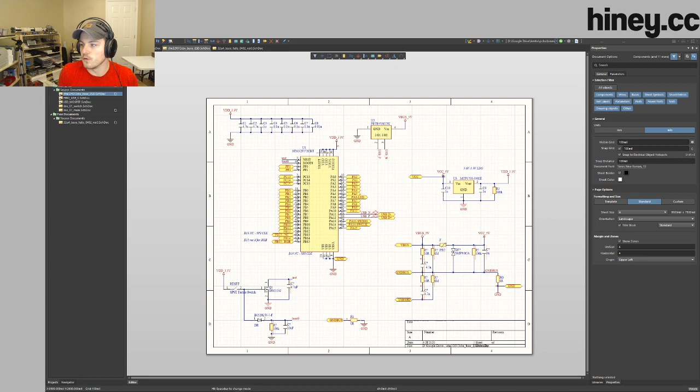Did it work? I think it switched. Cool. Alright, so I'm gonna try a series of streams, probably videos

that I will put on YouTube and other who knows what. The goal of this is to do a full stack development, basically designing a keyboard from the ground up, from everything. So kind of just my methodology on doing it and how I do it. It might not be perfectly applicable to everyone since a lot of people don't use the same software I use, but it might just be cool to see. It's an idea I've been wanting to do, so I figured I want to design a new keyboard, so I should maybe do this, just to do it. I think it should be fun.

Yeah, we're gonna give it a shot. Alright, cool.

This is gonna be my Ibis keyboard. I was just kind of messing around here with some of the PCB stuff.

Browser source, add source, Chrome. What's up guys. Add source, URL. That's not what I want to do. Delete. Thank you for following haamtime, much obliged. How the hell do I do this? Media source, window capture. Cancel. Alright, fuck it, we're just gonna do it this way.

Alright, so we're gonna make the layout for this. I usually start with your 104, but we're obviously not gonna use that. We're gonna do some other fun stuff here. Here, let me do this.

Let's do it this way. Keyboardlayouteditor.com, so it's just going to kind of be what I guess the layouts we're going to use.

So the goal here is to use the Duck Blackbird layout, except basically, fuck HHKB, I'm not gonna do HHKB. I think it's ugly, so we're gonna do just standard. So this is kind of what we're gonna do right here, in essence.

Like I said, I like to start with the base 104 key layout. Yeah, exactly, yeah, it's just not good.

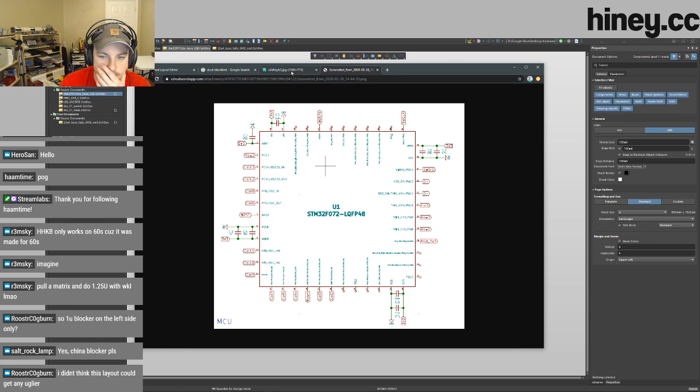All right, be nice. So that's gonna be another option. Honestly, I might just stick with those 3. Anyone that wants a 1.25 bottom row could suck me off. I might get rid of these. I don't like those.

Hi, Haley. Yeah, so that'll be the idea. Oh, we gotta do fucking split backspace. We gotta do fucking this stuff.

Stepped caps lock. Because if you're not using stepped caps lock in 2020, you're kidding yourself. Yeah, people like split backspace. I don't know, dude. I don't care enough to argue.

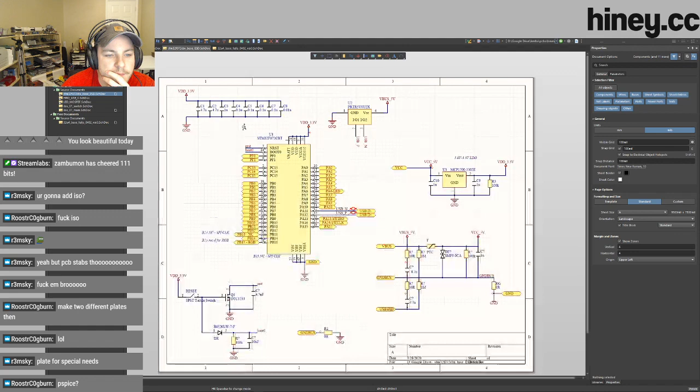always forget, so I was gonna edit this real quick. So VBAT gets 100 nano. So VBAT gets his 100 nano. VDD and VSS, or so this one's gonna be pin 48. I'll do that.

Text 1. So I know what pins these go on. 48s. Which one did I get? I got 100 nano as well.

Fuck off. Fuck knobs, dude. I don't like knobs. People are like, dude, knobs are so cool on keyboards. Like, I'm never gonna use it. I'm not gonna put one on a keyboard of my own. So I'm sorry, as I've said before, if you want to be a knob, you can be a knob. However, I do not want to be a knob. So I'm not gonna be a knob.

100 nano, 36 and a 4.7. Nope, it needs to be 36. Yeah, I think knobs are ugly, they have their purpose probably, but I don't want to do it. That's 24, right? 100 nano, 24. And then the other two go on pin 9. 1 unit 10 nano.

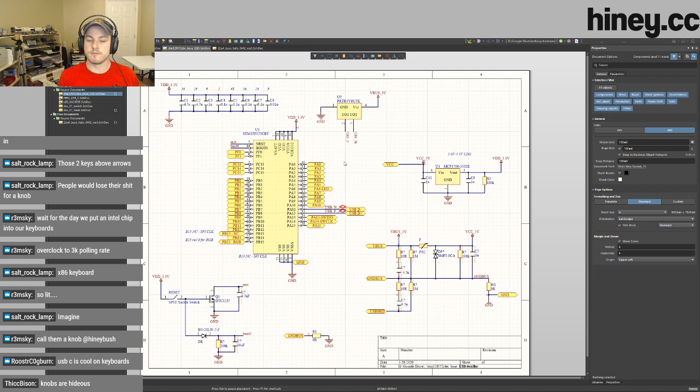All right, so the base is done, and the way I do these, as you guys will see here, I'll do it right now. So this is like the actual main schematic that I'm gonna be using, which will have everything that I need on it. The cool part is I don't need to put all of this stuff like copied and pasted. I'm gonna annotate this real quick. Update change list. Accept.

Anyway, so we don't have to take all this stuff and copy it over. What I do is, since I have it referenced in my project itself, I can just add it as a sheet symbol. So like here you can see this one's USB-C. However, we'll put that one in later. So this here is the microcontroller, so that's a symbol for all this.

Sheet symbol actions, let's make this taller. And so what I can do here is synchronize all this shit. And there's all my IO. Makes it super fucking clean and nice.

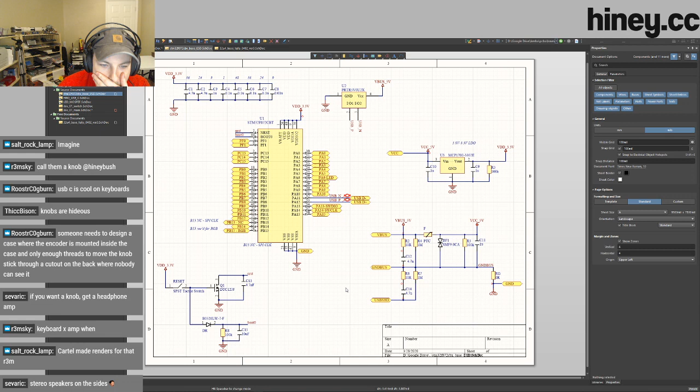Why do I have 2 grounds and 2 ground buses? That's kind of weird. Oh, because I have 2 ports. Alright, I gotta fix that. Oh yeah, I don't need this. Or this. I copied this shit, this is all ESD stuff. I copied all this from another schematic, so I had to fix that. Alright, we should be good now.

Yeah, the headphone amp thing, that was kind of dumb. I'll just delete those, I guess.

Alright, cool. So I guess the next thing with this is we can start doing all the fun stuff. Ground bus - I have 2 grounds here for USB stuff.

We'll go over that in a bit. What's up, Soran? How you doing, bro?

Alright, so this is my microcontroller and all this stuff. That's easy to do. We'll do the same thing here for the USB-C.

So it's like this. I hate, sometimes it doesn't switch over. I don't know why. Alright, fuck it, there we go - HRO USB-C.

And this one's gonna be the LED MOSFET that I use, so I'll put this up here because this is how to control the LEDs on and off. And then the last one will be the switch matrix, which right now might not be done. No, that's not done, I haven't done that one yet.

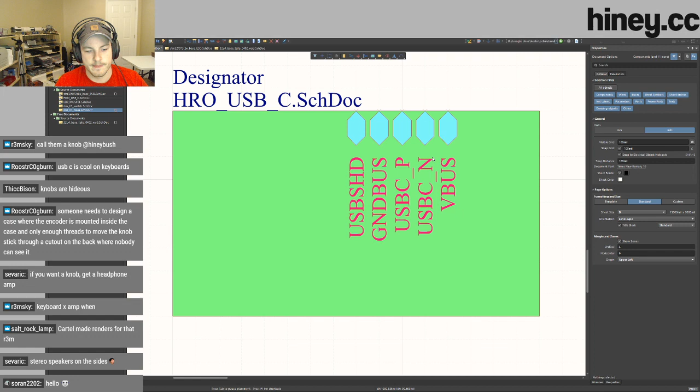Alright, so this is basically everything. So these are my USB symbols or signals. Here's my USB port, here are my CC lines. All this is already fully ready to go, which is sweet. It's super easy, so all I have to do here is organize these nicely so they're not in the wrong order.

Net them out - USB negative, USB positive. And then I copy this, so here - so now this is connected to this. Very easy, very easy.

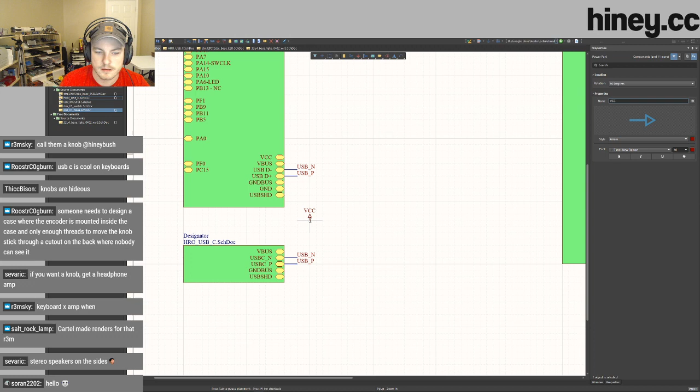Now I'll do the same thing for all these power ports, VCC. So VCC and VBus. VBus is coming directly in from the USB port. VCC is like a cleaned out, smooth version of that after all the ESD stuff's done.

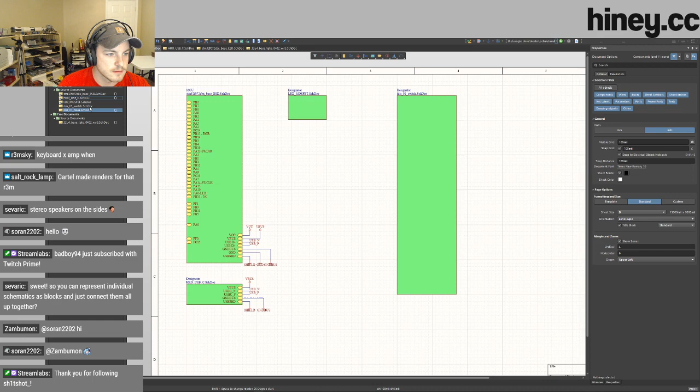So this is all I want to do with this for now. We'll concentrate on the switch matrix the rest of the time. So this is, I think, the switch matrix from my H88. So this isn't what we're gonna use.

Holy fuck, okay anyway. So we're not gonna do this exact matrix, but it's a good starting point, I guess, so I don't have to do everything over. However, I am gonna delete half of this stuff, so it's fun. Actually, yeah, fuck it, I'm gonna start over. Alright.

Alright, so I gotta add some switches. So I have a whole bunch of different ones - I have hot swaps, I have some keep out, I have non-keep out, I have hybrids. I might continue with the hybrid stuff.

Cause I kinda, dude, I miss Unreal Tournament. Unreal Tournament was fun, we played that all the time in high school. I think we played UT 2004 in like 2011. Those were the days, it was so heavily modded because each generation of students would add more and more shit into the folder that we would copy onto our C drives. I haven't played... actually no, I did play the newer one. I don't know if it's the newest one, but I played it a bit, probably 2 or 3 years ago, I want to say. It just has so much nostalgia associated with it in my head.

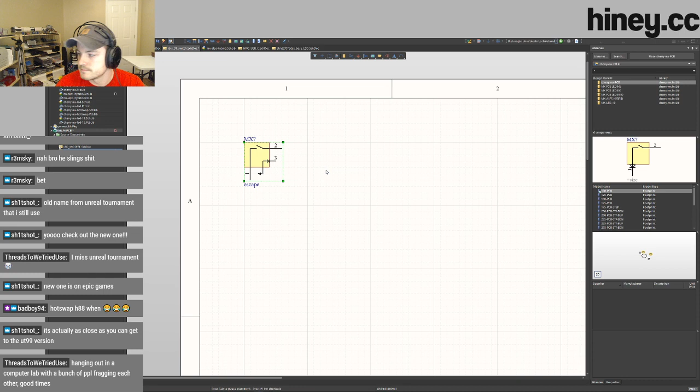Hot swap H88, when? Probably whenever I get around to just doing it, because I do want to do that. Yes, Duck Boy, I am a nerd.

Alright, so this will be escape, this will be F1. This is easy for me to keep track of what's what, I guess. F2, blah blah blah. Thank you, Saygan, for that follow. F4. This will probably take a little longer than normal because today I just click and go, but we're doing this a nice way.

I'd be sick if I get these to increment nicely, but that won't happen.

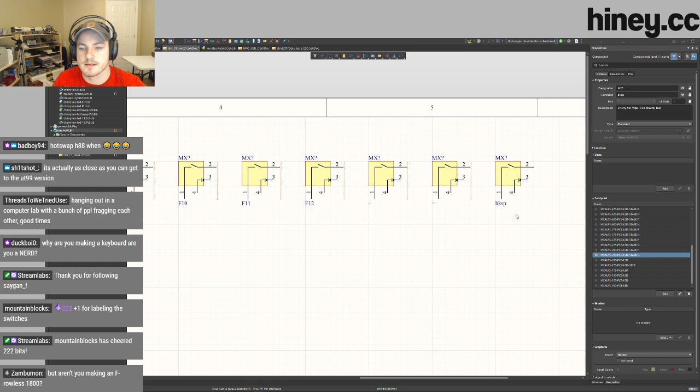Sometimes I do try to reuse these, but since I'm doing a new method, I may as well start it over. Thanks for cheering that, I appreciate it. Honestly the main reason I'm doing this is so I kind of know what's what. So for this one I'm going to do stab down, south facing stabs I think for most of this. Oh, I think I'm going to make a bigger sheet.

Goddamn. Thanks for cheering those bits. Aren't you making an F-rowless 1800? Yes, I am, that is what this is. So what does that have to do with anything? I'm not following. We're also gonna need a key here for the short back or the split backspace.

So do that, and then it was just gonna be page up. We'll just call it page up, doesn't matter. Ibis before or after H60. H60 protos are like coming in now, so this is probably gonna be down the line sort of thing.

It's just gonna be fun to do. I don't know, make this one num. I don't even know what the hell keys are on the keyboard anymore. Num divide. This would be num. That thing.

I'll do pause because I like pause here. Or no, what typically goes there? Minus. Num minus.

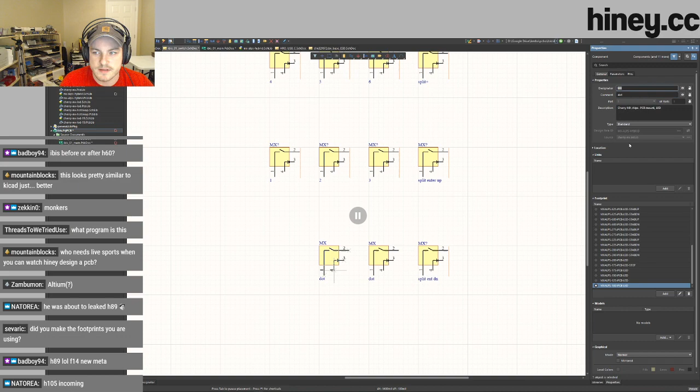Cool. Alright, so anyway, let's go back to the main alphas over here. MX Alps hybrid. This will be a stepped caps lock and regular caps lock combo. So it'll be a combo caps LED.

Do 1Us. Full size customs, dude. It's gonna happen. I'm waiting for it to happen. The demand is, I think, finally there. So I think that'd be neat.

S, D, F, G, H, K, L.

Colon, call that the colon key, and then the quote key, and then this is going to be a 1U ISO key, 1U ISO dumb, and then this will be enter, which will just be one combo enter key. So yeah, that will be that.

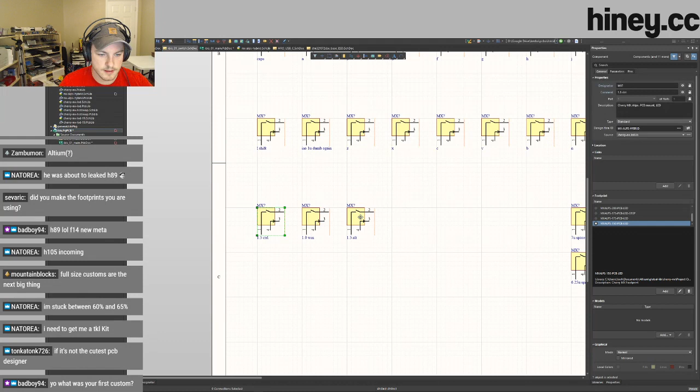So 6.25. All right, cool. So I'm gonna copy these since these are my 1.5s. I just put them over here. I do want to leave. Actually, I'm gonna group the 1.5U and the 1.25U control.

My first custom keyboard I owned, or one I designed. The first custom one I owned was probably, I think it was my... I don't even know. What was my first custom keyboard I owned? I want to say my Jane V2, but I don't think that's correct. Maybe my original HPCP. No, Biscotti was before that. Maybe Biscotti, I honestly don't know. Or maybe the meme, one of those. I don't even have half those boards anymore. I think it was one of those. But then again, I designed the meme. Like the first custom board I didn't design myself that I bought or that I owned was my Jane V2 that I have. I'd say that one.

So I want this to be under the right shift, and then this one would be right under here. So we'll do 1.25U's.

So this would be what? 1.25U, nope, MX. 1.25U alt.

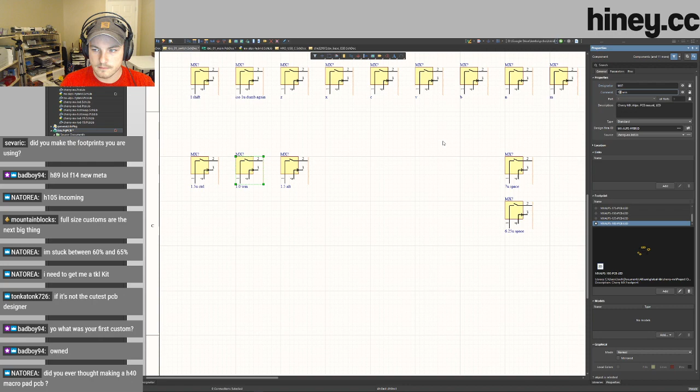All right, cool, so there's my switch matrix. Kind of the next step I want to do is simplify this a little bit, make it better. Right now this would work perfectly well the way it is. There's nothing wrong with this layout. However, it's not extremely efficient.

For example, you have 5 rows, so row 1, row 2, row 3, row 4, and row 5. The 2 space keys here will share a row, same with my Win and Control keys. They're the same key, just 2 footprints on the same key. And you have your columns, 1, 2, 3, blah blah blah. So the issue is these couple keys here, where if I left this how it is, my main backspace key, MX15, would have its own column. And then my page up and page down, my 2 little 1U keys in between, would also have their own column. That's okay, but sometimes you're forced to use a certain amount of I/O.

Luckily with this STM, I don't really have that issue, so I could just leave this how it is, but I don't want to do that. I want to make this better. So I'm just going to move these 2 down into here. All this does is change the physical key map basically, but you can still place these wherever you want. Just because this MX36 is where it is in the row-column matrix, I could still place it over here if I want to. It really doesn't make a difference there. So with these I'll actually do the placement here in a second. I'll just have to run a row up and over, and then join the columns up as I go. Anyway, let's do that real quick.

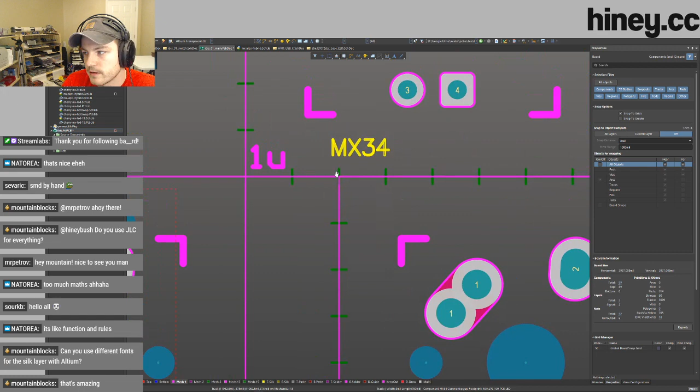And I'll do the same thing here just to double check. Easy game. 17, 18, 19. So yeah, there's the top row, and we just do that for the rest. It's really straightforward.

Let me grab, nope, wrong thing. 34 is page up, 53 is page down. Let me find MX53.

What's up, Elgo? So yeah, that's good to go. I think these are my numpad keys, 35, 36. I don't have my comments on for some reason. I'm not even sure what layer they're on.

Yeah, Altium is definitely expensive. I have the luxury of, since I use this at my real job, and I've also used it since college, I have 2 license options available, which is really sweet and useful for me. But the problem with hobbyists getting into Altium is it's expensive. I'm not really aware of any hobbyist or educational licenses, but they might exist.

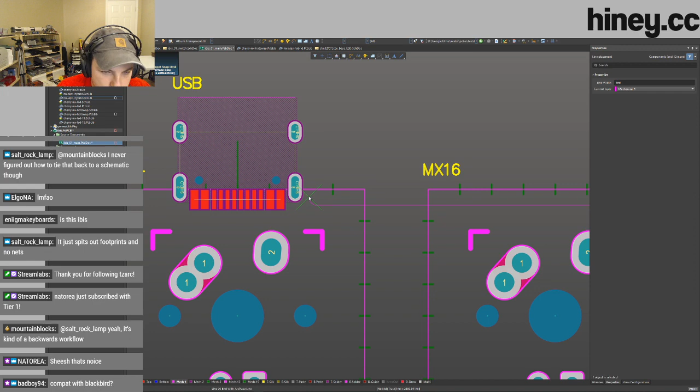And this will keep pretty small. I will do the same thing here because I like keeping these consistent. We'll lock that so I can't move it. And I love copy and pasting with a reference point, so you can copy something with a specific point in mind and then paste it on that same point.

Super easy. Oh no, I think it overlapped. Yep, alright cool, so now we select.

DSD, oh that hit tab, so that selects everything. DSD. Why isn't it working? I gotta delete these, I guess.

Alright, so there's the board. Pretty straightforward. But this is kind of too far out for my liking. I like to take most of my stuff and lock it so I don't actually drag shit around.

Yeah dude, rectangular PCBs are just boring dude. Imagine a rectangular PCB, could be me. Could be me, might be me one day. But it's not me now. Too good for that.

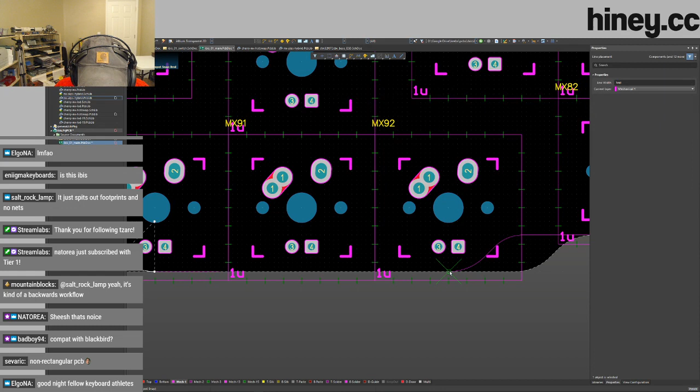That's cute, that's so cute. Actually no, I don't like this again. I don't like this again. I'm gonna have the least amount of overhang on this part as I can.

Redo it again, redo. That's better. No, there we go.

This is the kind of stuff that I struggle with making fully right.

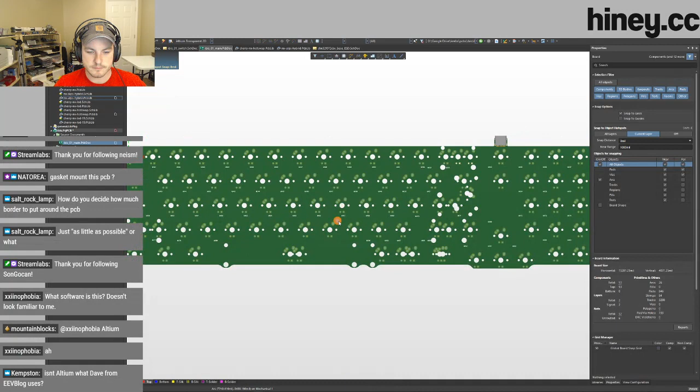Probably. I don't really follow EEVBlog or watch their stuff too much. However, probably should.

All right, so here's the bare minimum. Actually, this is a lot less than the bare minimum for what you need for a PCB. You know what? This might be fun to do.

Oh yeah, no problem, sevaric. Appreciate it.

Yeah, those are even old. I have newer ones that I haven't released because I don't have any of the legends done. But yeah.

So I'm not fully concerned. I'm not fully happy with how far this PCB port is sticking out. I might do a daughter board on this. We'll figure that out in a couple minutes.

All right, so anyway, at this point we could go and take this thing into CAD. Last thing I need to make sure I do is get the proper thickness. So right now, oh, it already is. Cool, 1.59, 1.6 millimeter, that's close enough.

DCS, I've actually kind of started working on DCS, which is funny. So I will get to that. I'll finish those someday, at some point. I don't know, eventually.

So at this point, we could take this, export the step file. We'll just save it as the default name. Export all bodies, component suffix none.

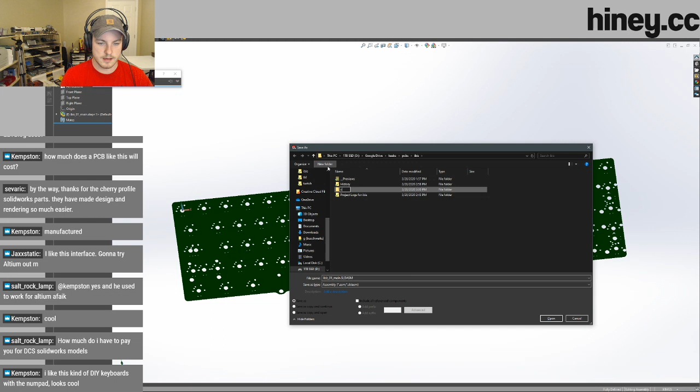So here's the 3D model of my PCB. We'll just save it as a SolidWorks CAD. Cool, so there's my PCB model.

What we'll do now is make an assembly from this. We will import this, make sure the orientation is correct. So yeah, there's my... I want to mate this to the top.

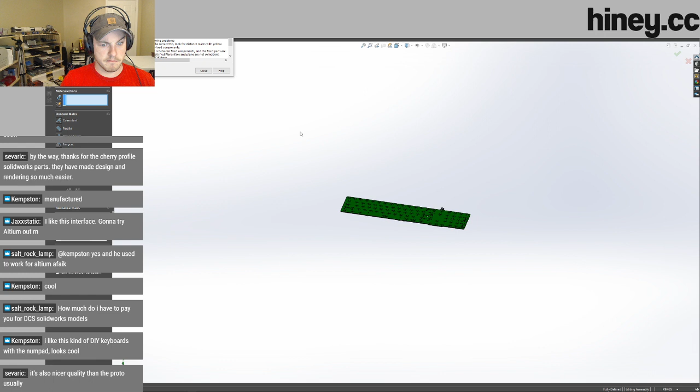Oh, that's a fixed component. Never mind. So we're basically going to design everything relative. What the fuck did I do here? We're going to save this as IBIS case.

So we design everything relative to the PCB. At least I do, it's the easiest way for me to verify that the PCB will in fact fit in the case, because there's numerous instances where the PCB doesn't fit perfectly. Why is this still yellow?

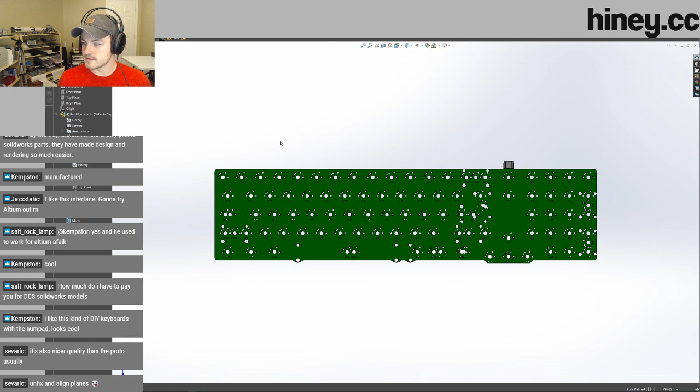Alright, fixed. There are instances where this stuff is not done right. Unfix and align planes? How do I align the planes? Oh.

See, I'm actually not that great with SolidWorks. Like, I know how to use it, but as far as tips and tricks go, I'm not that great. How to align a plane? No results found.

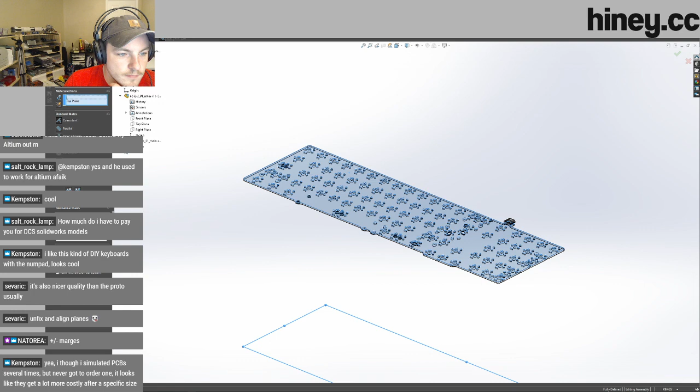It doesn't matter, I'll just mate it. That's how I know to do things. Top. Nope. That works for me. And now I'll fix this. That works for me.

Yeah, large PCBs, because they charge based on size and area, so they can definitely get more. That's fine though.

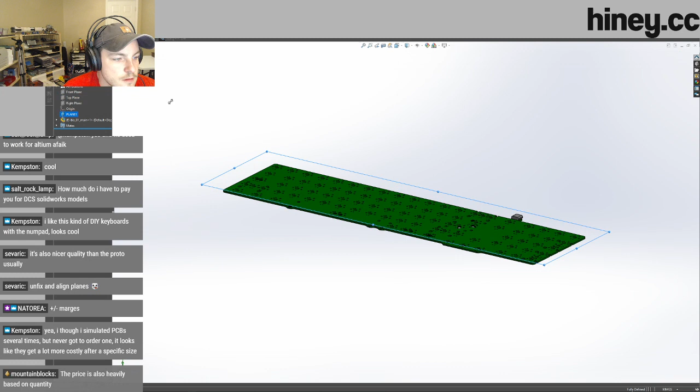So we have our top plane here, which is relative to the top of the PCB. The first big distance to make sure you're using the right way is the distance of the top of the PCB to the top of the plate, which is 5 millimeters. So I'm gonna make a new plane here that's offset from the original one, 5 millimeters, and we'll name this plate top.

Oh, I see, okay cool. Yeah, so I don't really do mass stuff too much, besides like hey, this is how much this thing could weigh type deal, because I don't really do too much simulation or other work like that. But yeah, I'll look into that because that would be good to know.

So anyway, plate top. We're gonna make a new part on this face, and we're gonna name this part IBIS plate.

A lot of people actually do a full-on sketch, like they'll sketch out their switch footprints. But my favorite thing about SolidWorks is I can go in here and I have documents saved, called blocks. I have a whole ton of them saved already, I usually use these MX no cutout ones. So you can just take these blocks and place them. And they're all relative, so if I change this block, I have to go back and edit every block, which is a pain, so I'm not gonna do that.

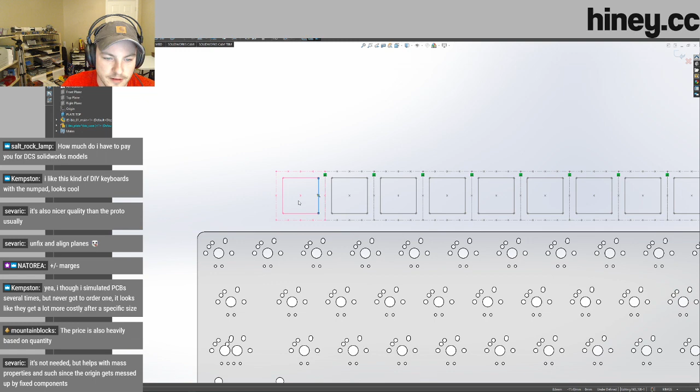Actually, I am gonna do that right now. Edit block, because I wanted to make a construction line, a circle in the center of this for construction. And you can see it changed all of them, which is really cool.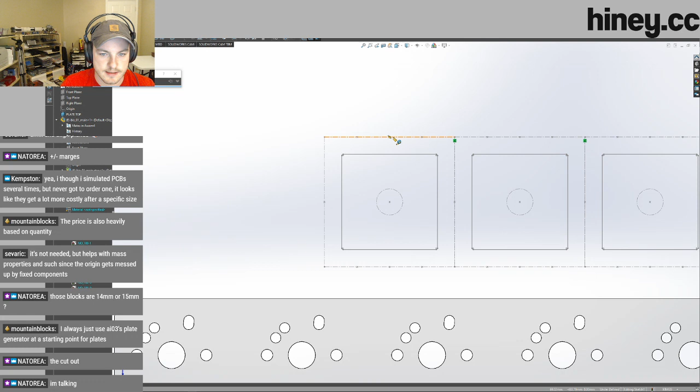I'll just resave this existing block. Keycaps, keyboards, SW blocks, where the hell is that saved? Cool. So these blocks, this inner cutout, this is 14 by 14 millimeters, 14 total, 13.6, it says this length is because these radiuses are a little smaller. And then the overall size is 19.05 millimeters or 0.750 inches, which is the proper spacing. So placing these out is the perfect 1U spacing.

So what I want to do next is take this. Oh yeah, see, this is like a fucking ugly chain, so these are all coincident only on those corners. So actually,

we'll just restart that. So I can have a sketch, blah blah blah, point. This is the center of my top switch, so that's gonna be fixed. So I'll just drag this here, that's my top switch, my first switch.

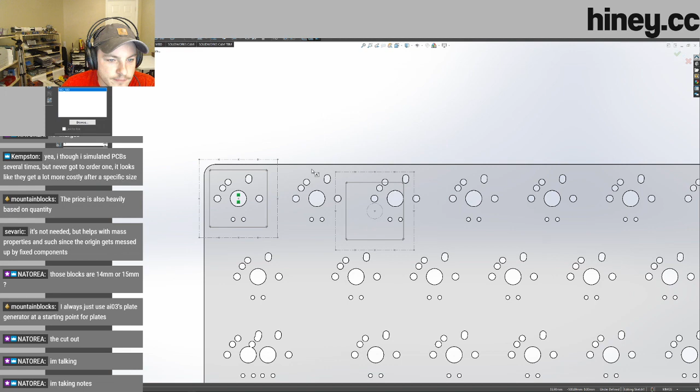And now I can just insert the rest of the 1Us super fast. I'm not really worried about the turning of them and stuff. And then I'll also do, see, I switched to this smaller buttons, and I don't know where anything is. Copy, I'm gonna copy relative to that and then just paste. Super quick and easy and fast.

I'll do the same thing here with these holes, pretty much only on the ones that I'm gonna need to center. I'll just copy this.

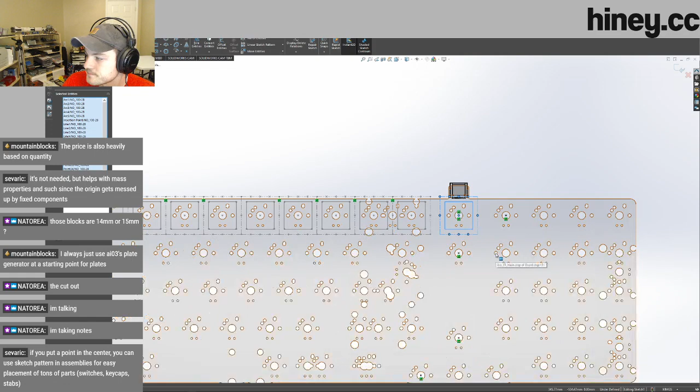Yeah, I've done the sketch patterns a lot too. I usually just find this easier since it's like one click and you're good to go. Whereas with a sketch pattern, you have to worry about your axes and all that kind of stuff. And this is easy enough just to do this.

Copy. And you might be wondering about the 2U cutouts, that kind of stuff. We'll do those after, I'll do those on a separate layer. For right now, I'm just doing the 1Us.

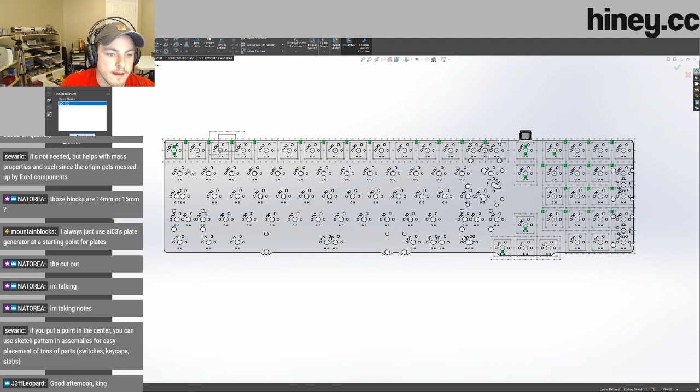Well, I guess just a base easy layout. There we go. So do 1.5, and I also put those little divisions on these, not as many, so it's not as perfect or great, but it does a good job.

What's up Jeff. So typically, yeah, I'll just place these based on the top corner, it's just an easy reference point. Actually, I'm gonna copy a bunch of these again.

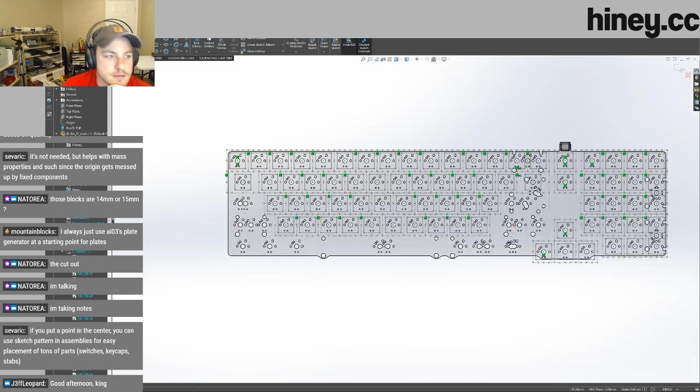Yep, and these all just line up really nicely based on my stagger. And then you can delete these extra ones you don't need. Cool, nice. Now I just gotta worry about a couple other, more specific ones, step caps.

Yeah, the alignment markers help a lot, especially when you're just trying to do this. It makes your workflow go really fast.

At one point I had a block that was most of these alphas, but I messed it up, so I don't really use it anymore, obviously.

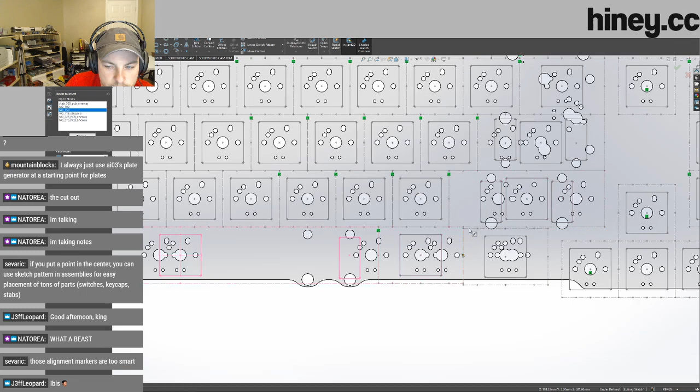All right, cool, so those are my switch cutouts. Ready, now I'll do another sketch on the same plane, and this will be the outline of the plate.

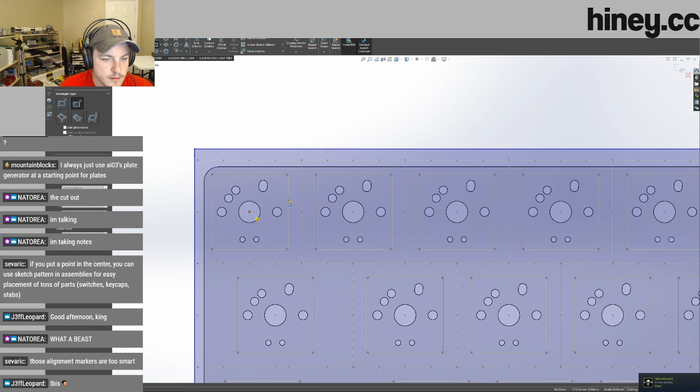So there's no alignments or anything right now. The first goal of this is just going to be making sure things line up how I want them to. The outline of the caps I don't really put in typically, we'll just do one here for simulation. Make these equal.

18.2 millimeters. So I want to make sure the plate extends further out from the center of the switch than the bezel of the top will, and two, that it doesn't extend too far. Typically I will do my bezels at 0.9 millimeter.

So this is just a line for the hell of it, 0.9. I want to make sure this extends like 0.2 beyond that. Not the length. 0.2 millimeters, it's pretty small, that should be like 10.2. Yeah okay, get rid of that stuff. 10.2 millimeters.

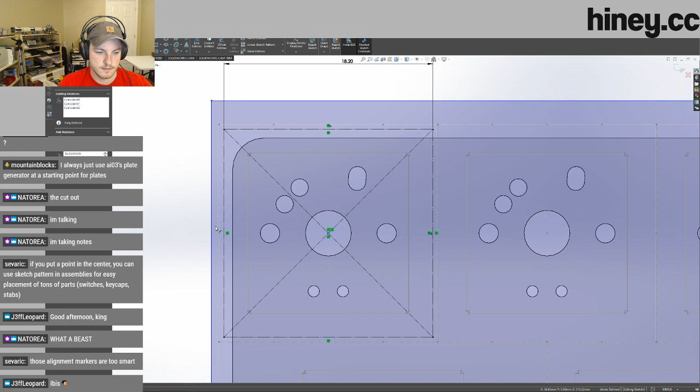And we're gonna make this dimension equal plate spacing. Yes, create a global variable. And then instead of putting in 10.2, plate spacing.

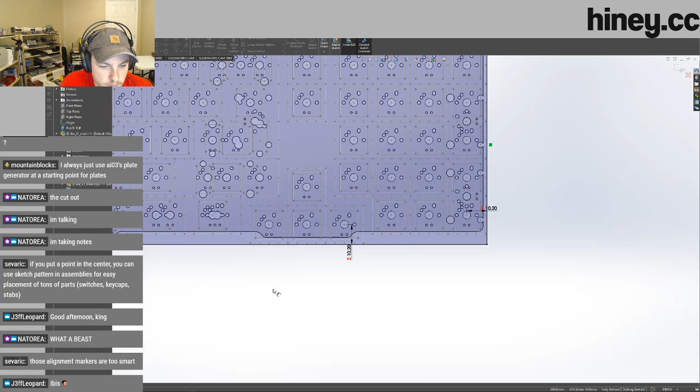We get out of this corner, select this 1U, and do the exact same thing. But we don't want to do the vertical, we want to do that on our furthest down one, so that'd be this one. 10.2. All right, cool, so that would be the start of our plate.

I don't want to keep all this like that, so I actually will, you know what, we're gonna do it this way. I'm gonna make a corner kind of cutout thing here, which will be the same, .2, same thing here. Keep typing it in. And I can trim that and that out.

And so you might hear my girlfriend sneezing upstairs. RIP.

The plate doesn't matter, so since this is kind of intersecting that, it doesn't make a difference because the plate is higher. Don't forget.

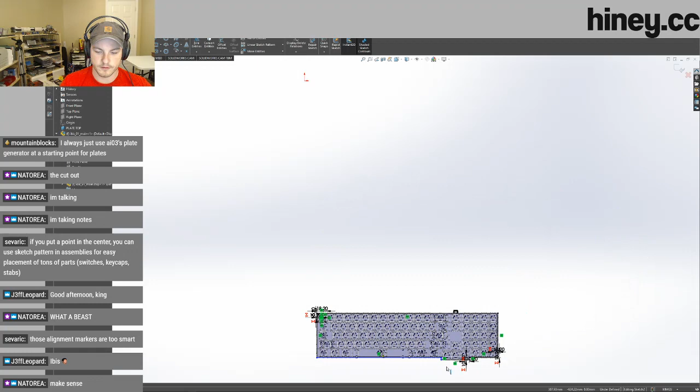All right, since these two are floating, if they're blue in SolidWorks, they're floating points. Like I can change this dimension I want all day. I don't want to do that.

So we're gonna make this the same thing here. Dimension, not M for measure, D for dimension. But instead of, pooper. So there's that. Instead of doing a true dimension here, we're just gonna select these two and make them collinear. That forces this to be stuck completely in line with this one, which is nice.

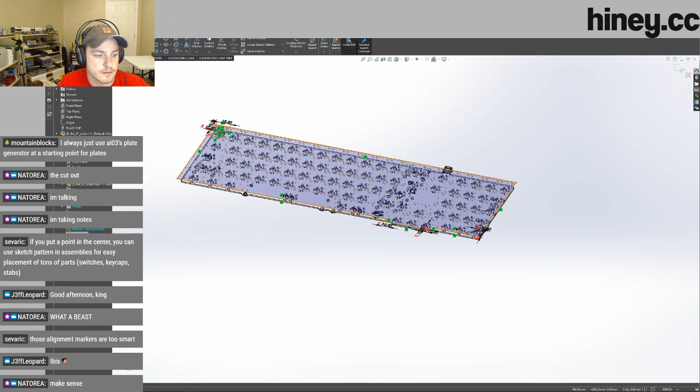Now what we do is select your sketch, extrude it. Make sure we're extruding down because this is the top plate, the top face of the plate. 1.5 millimeters, so there's our base plate. If I turn the sketch off, you can see it's just one solid piece.

Then what we do here is select our other sketch with our blocks, extruded cut through all, and there's your plate. Turn that back off, so that's the start of the plate.

What keyboard am I using right now? This is my KFE with Hasbro here. I'll just unplug it. It's a wide-ass angled lens on that fucking webcam.

So, like I said, my big concern...

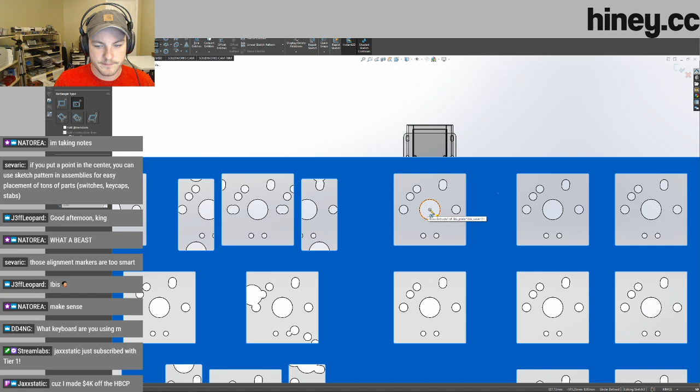So I'm going to show the sketch again, and I want to make... actually, no, I don't need to show the sketch. So I'm going to make a new sketch here. This would be another one of those instances of a reference point for a switch. Nope, not perpendicular, equal. So this would be another reference point for the switch itself.

So I want to make sure that this USB port isn't going to stick so far out that it's going to be super ugly.

So yeah, so that's 18.2. We're just going to draw a couple of lines here. So there's line 1, and there's line 2. These two lines are visual interpretations of the case.

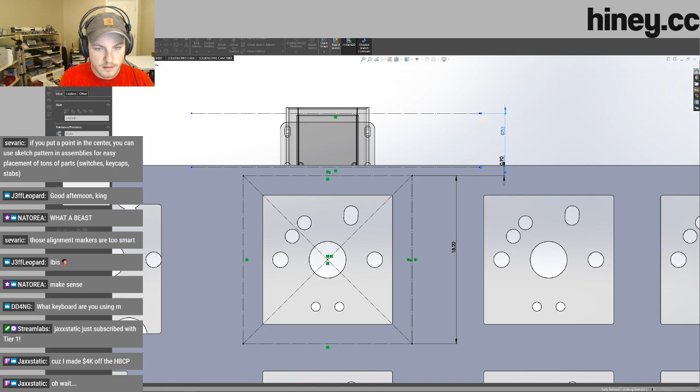Think of your top case, like this is your bezel. I'll make sure my inner bezel is 0.9, like I said. So this is where the inner part of the case is going to sit, and this is the outer part. 5.8, that's pretty good. I usually like to make my bezels kind of thin, less than 7 if I can. 6.5, if I do 6.5 that would be flush, which could kind of look sick, but I don't know if I want to do that.

I don't know if I want to make it flush. I don't think I want to do that. So let's just make it a little memey, because I just don't like the idea of a flush USB port. I'll make that 6.9. That's a good number, right? Cool, so do that. And that might look nice.

Alright, sweet, we'll mess with that, we'll start with that. I'll make a new part again. This is going to be my top case. I made it on the face, this top surface here, the plate.

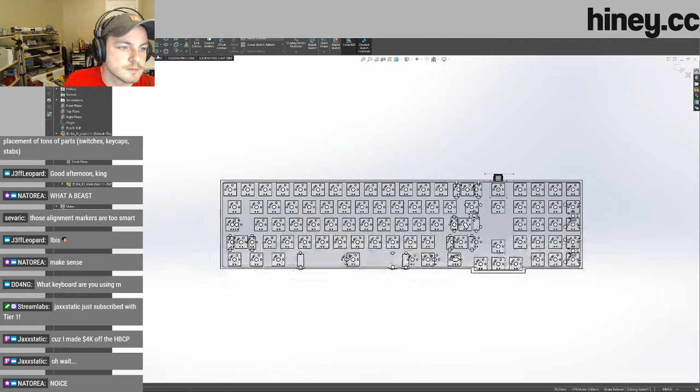We're going to start not with a rectangle, but with some individual lines. What I want to do here is just do a quick, dirty outline of all my parts that would technically be cut out of the plate, where my switches are literally going to sit. I'm just doing this kind of randomly, nothing lines up yet, nothing's going to be equal. Like, that's not even horizontal. Now it is.

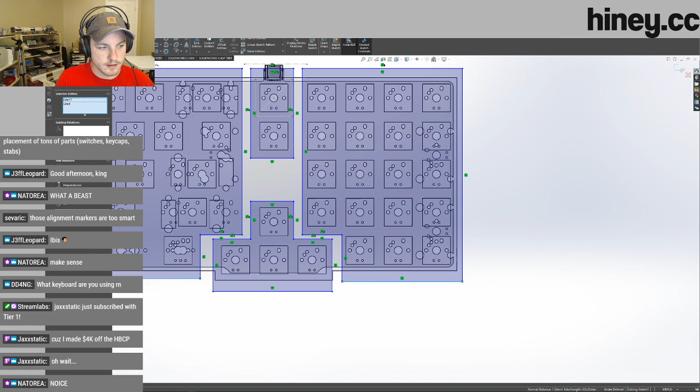All right, sweet, so now we can start lining all these up. Collinear, I love the collinear ones, it's just easy and nice to do. Just kind of lock some shit into place. Collinear, collinear - I'm not gonna do this middle one collinear because the switches stick out further. Collinear, nice.

So when I drag this down, all three of those are gonna drag with it. So I actually want to make these collinear with that now, so that's gonna be my true inner surface. Now the annoying part is I need to figure out the distances for the rest of these, so it's gonna be exactly 10 millimeters, which should be easy to do.

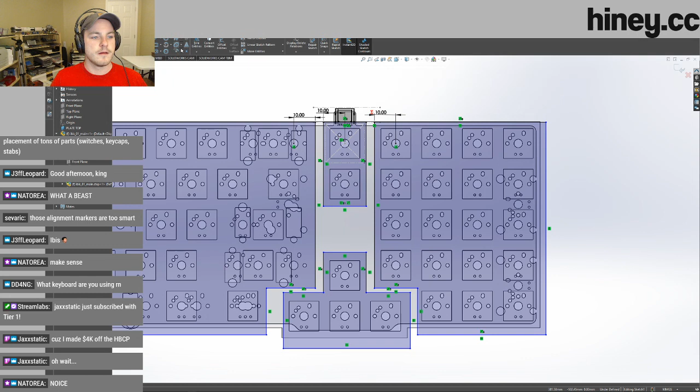I'm just gonna type in 10 on these, may as well. Actually what I can do with this is line this midpoint up with that center, so that way this side's perfectly aligned as well. Equals 10, good enough. I'm just gonna put these on a bunch of switches to use as references, put this on this one as well.

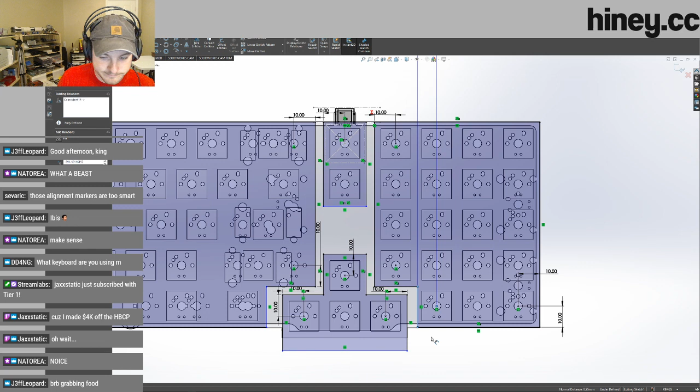This is probably a little messy, this isn't the best way to do this honestly, but it's quick and dirty and it works for me. So if you're doing this, you might want to take a little more time and actually line the stuff up the right way. But yeah, this is my way of doing things, not the right way to do things.

Another annoying part of this is, since I'm referencing all these off of 1U switches right now, where it's either a 1 or a 1.5, you want to make this bezel the same as this. So what I usually do is dimension it, and this is called a driven dimension - you can't physically just change it because everything else around it is already fixed in place. This driven dimension, this 3.81, is based off of these other spacings and relations between lines and points that are already in place.

But they're super useful if you're trying to reference something. So I want this to be the exact same distance as that, so I just do that. So this is now this dimension, and that's verified. And then I just have this last one.

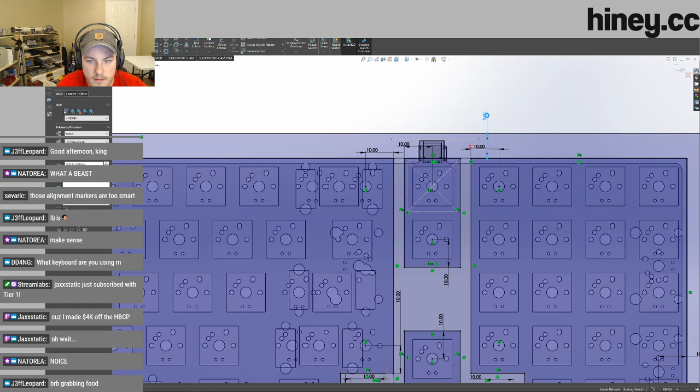So this would be my inner bezel of my top case. But now I want to do my outer bezel, so I will just draw a rectangle again - what did I say, 6.9? But I want to do my outer corner, I guess, side bezels, like I like doing 2 or 3. We'll try 2 out - 2's pretty narrow. No, let's do 3, I like the little chalk on them.

And then I want to make this one - this is going to be a little different. Make that closer to like 6.4. What's this dimension here? 1.6, that's good enough. I'm gonna say there 3, say 3 again. All right, cool.

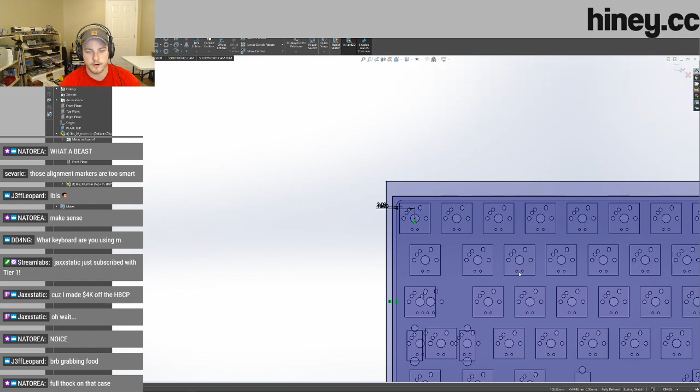And we take that and we extrude it up. I like doing like 7.8 for my bezels. Anywhere between 7.5 and 8 millimeters is usually really good for GMK caps.

Sometimes you need a higher bezel for like SA or DCS, because on a GMK cap I can literally show you. Keyboards, keycaps, new Cherry MX blanks, row 1 solid part.

So, why the hell do I have like a fucking lighting environment in here? Anyway.

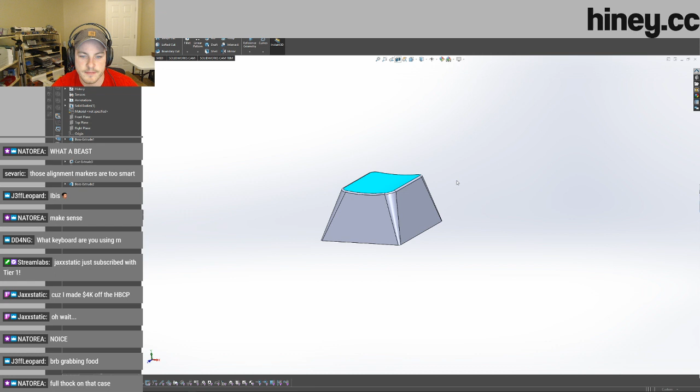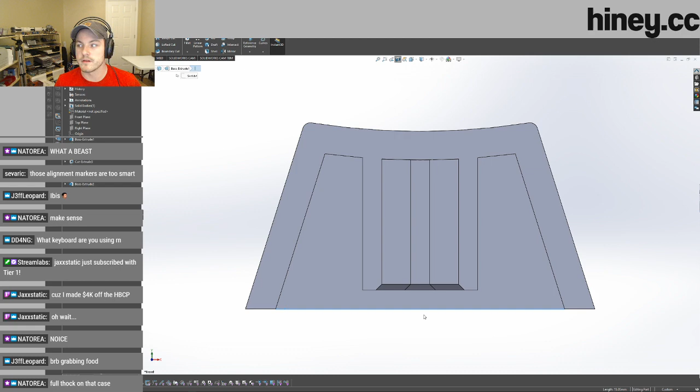So the stem is not perfectly aligned with the bottom. It's inset roughly 1 millimeter, pretty much just 1 millimeter. So your keycaps will sit a little lower within the keyboard system itself, versus like SA caps, and I think DCS are the same way, where they are actually flush with the bottom. So you need to account for that with a higher bezel more often than not, or just don't use them.

So yeah, there's the top. And I actually don't really like how that looks. Let's rename this Ibis top.

So we're gonna edit that. We're gonna make that 7.2. Honestly, I just kind of eyeball it and just guess. That's a little better.

Cool, all right, nice. So the only other thing I really want to do right now is add some fillets to this top portion. So I like to do 1.55. You could typically do 1.5, that's what my manufacturer recommends. The problem with doing straight 1.5 is they'll use a 3 millimeter diameter, or 1.5 millimeter radius, end mill to do them, and you don't want a tool to have the exact same radius as the part you're milling, or as the curve you're milling, because it's like an in-and-down versus actually following the curve.

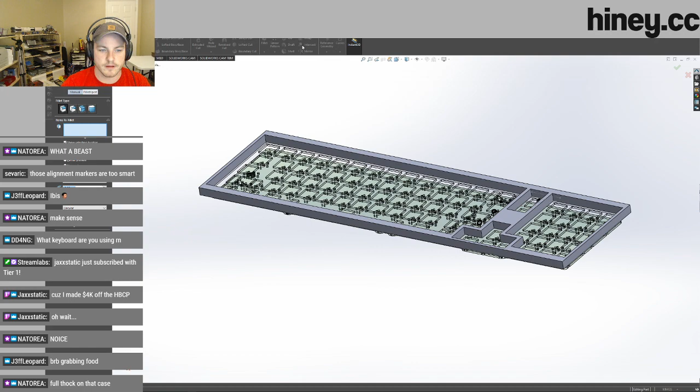So I add like 5, what was that, hundredths of a millimeter on, which makes it nicer. And you can select all of your inner corners and shit, but I have outer corners that I don't want to make that radius, so I don't want to select those, but I will do that here.

So fun. Anyway, I'm just going through getting all these corners selected. We'll probably miss one or two, but that's okay. I can always edit it.

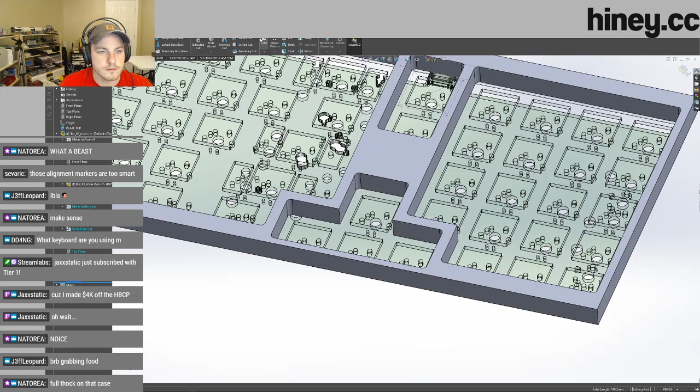All right, there's my outers, and then I like to do like a 0.3 on my outer corners, just to be enough to not be a hard edge corner, but it's just enough to round it off and make it look kind of nice.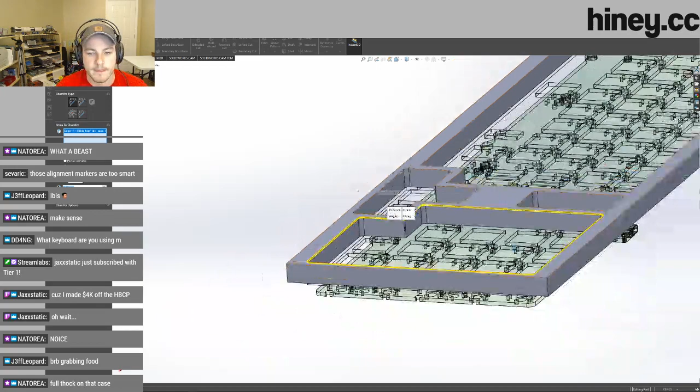Another thing to keep in mind when you do that is your inner radius is going to be your limiter for how deep of a chamfer you can do on your top surface. So here I can do a maximum of 0.3 millimeter, which is what I normally do. But if I do a 0.5, this is so small that it doesn't really work physically. You can make it work, but it's not going to look good. So yeah, I do like a 0.3, we'll call it. And it's still enough to keep it nice and square looking, but knock the edges off and give it a good little adjustment there.

Save all that. And I haven't done any kind of plate cutouts, we'll do that down the line. I also have to add in the rest of the other switches and the other cutouts and stuff on the plate.

Another thing to note here is we'll do a little more of this top actually. So I like to bring my top down to meet the midpoint of my USB port. That way when the top and the bottom close together on it, it's like a really nice looking good sandwich.

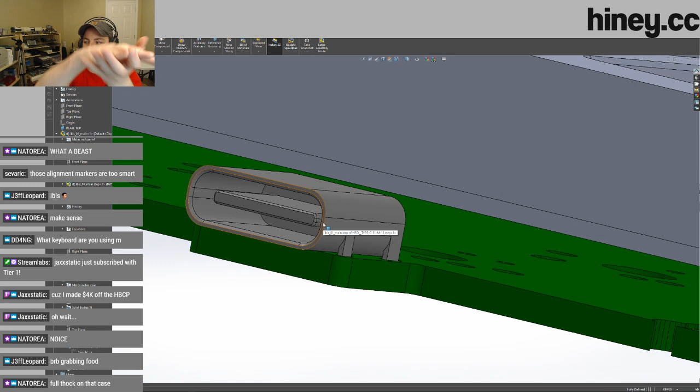So edit this component one more time. I'm just gonna put this face. I'll do a center line. That's just a reference, just make sure it's somewhere in the center. Like, this is obviously not the same points on either side, but it doesn't make a difference.

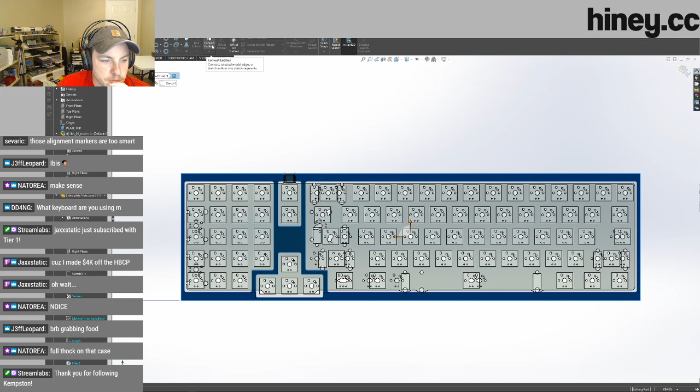This isn't working. Oh, I got to sketch first. Convert entities, all right, they're done. But now I want to do this, because this is going to come down further off the plate, like this was going to surround the plate itself, so I got to make sure that I am outside of that.

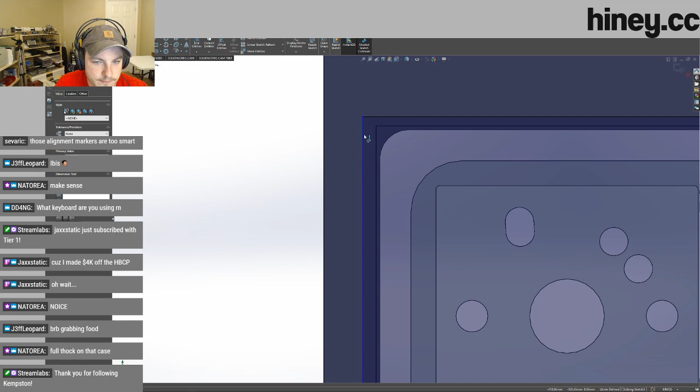We'll call that 2.2. I'm eyeballing these. As long as it's pretty tight, typically you're usually okay, that's how most things are. If it's tight, I'm usually all right, unless it's too tight. What did I say on the other side? 2.2 or something? Yep, and I'll do the same thing down here.

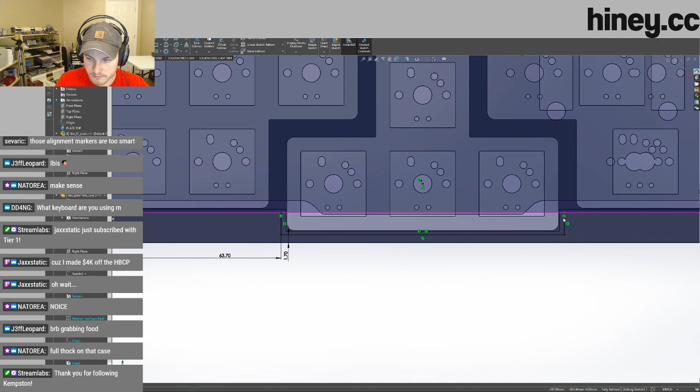We'll do this. Vertical, boom, lock that in. I'll make this 63.7. We're gonna have to round this once we get to that point, but I'm gonna stop doing it right now because I don't care enough.

All right, so we're gonna extrude this feature. You can see that there. We're gonna extrude it to this line, up to vertex, well to that point I guess. Extrude, blah blah blah, so now it perfectly intersects the USB port, which is pretty sick.

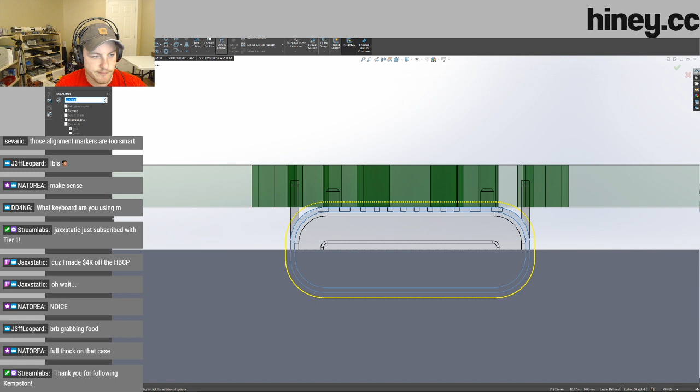Now last step, edit the component sketch. I'm gonna take this, offset entities. I'll offset them like 0.3. Nah, 0.2, we'll call it 0.2. Construction geometry, blah blah, bam, so that's sick.

Features, cut through, that's good enough. All the way through, and there's my USB cutout. Oh, the start of it.

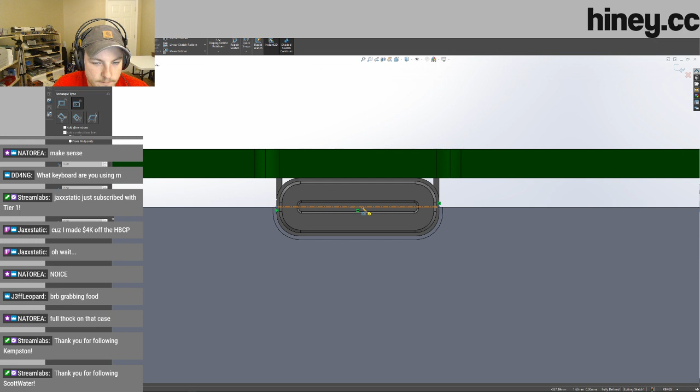I forget how big I make these, like 16 by, I don't know, 6.5?

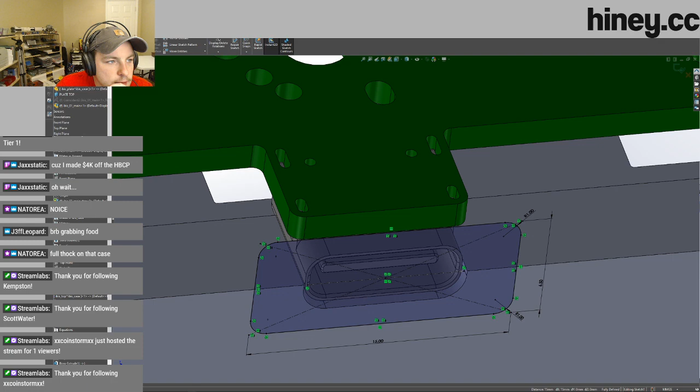Oh no, I didn't even do that on the part. That's okay, that's actually a good thing, because now I can edit this and do a sketch on this surface.

And what I'll do here is take that sketch I just made and convert it, and now this is referencing it, so I can do the same thing on the bottom half.

Super easy, extrude cut up to a surface, and I want that surface to be... why can't I select that? This. No, what the fuck?

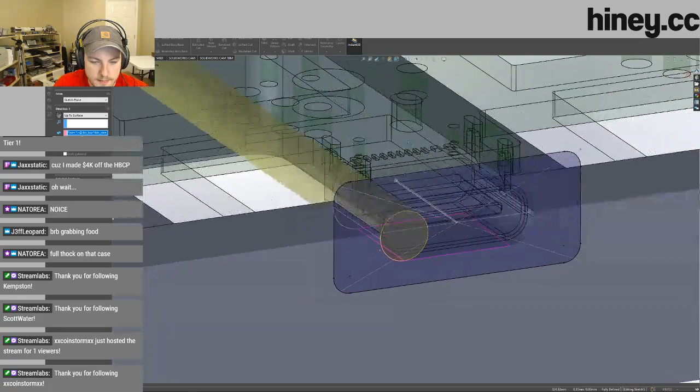That's not what I want to do, bud. I want this to select, hopefully, this surface. Does not like that? I guess it doesn't like that.

Blind, 0.4, alright we're just gonna eyeball it. Oh wait, here, I'll just do up to vertex. There we go.

All right, so now, at the end of the day, that'll be perfectly flush. 3-foot pipe, that's just the RGB. So yeah, there's my USB cutout.

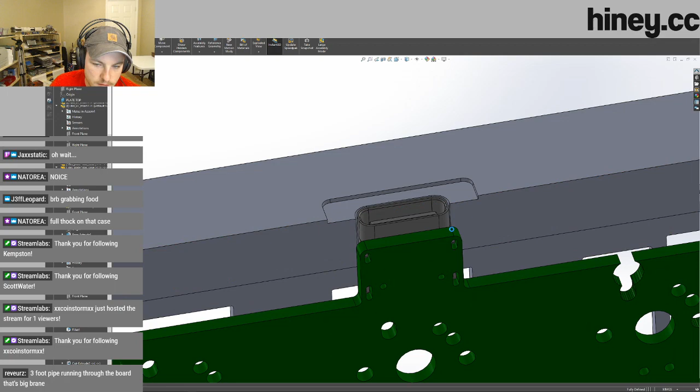I can turn that sketch off. So yeah, that's super easy, super nice, super good to go. There's actually, I'll have to make a cutout on the plate here too. Turn this off.

So, nope, wrong one. The USB port will kind of cut into the plate here. So we're just gonna add this.

Sketch center line onto this surface. We'll reference that, blah blah blah. Make this come out just a little bit further.

No, not a center point, corner rectangle. Vertical, coincident. How wide is this? 12 is good. And how deep do we want to go? 2? Maybe 2?

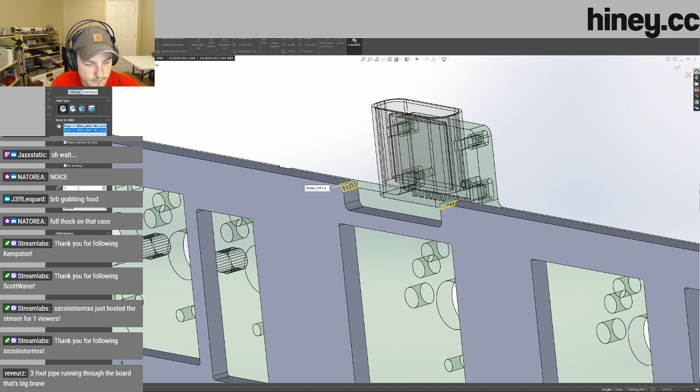Money team, cool, and we'll do these fillets again, 0.5 I think that's what I use on these inner corners. And we'll do the same on the outers, we'll do 1 point, we'll just do 1, straight up just 1.

Cool, all right, nice. So as far as the PCB goes, we should be perfectly good now.

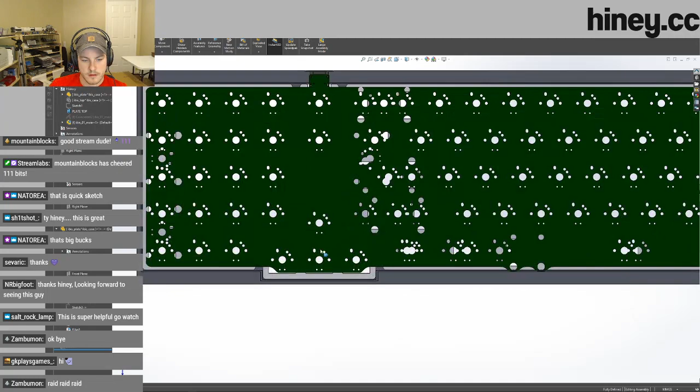I'm thinking of maybe doing some kind of indicators, something fun here like a little RGB daughter board, perhaps, I don't know, we'll figure it out. So yeah, we'll keep it going, make it work, make it look good, hopefully. Do some fun proto shit.